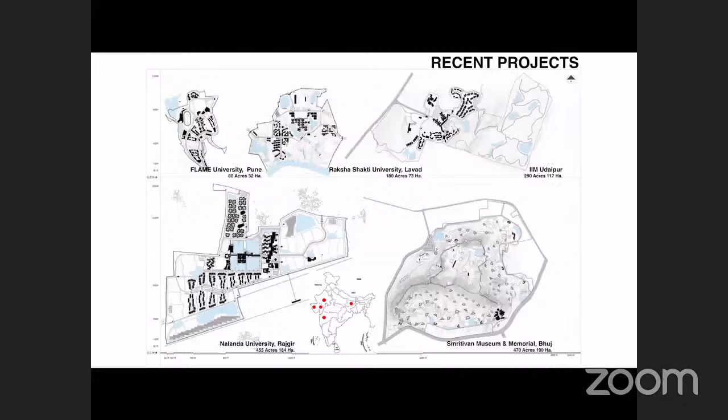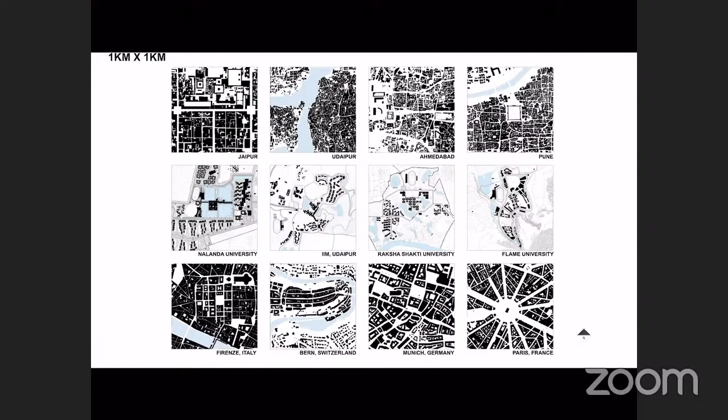So these are cities in a sense. And then, of course, we imagine that these campuses will be in isolation because they're mostly in remote places away from the city, because that's where you can get land cheaply. But what happens once you get this land?

Slowly, this university comes in, and as I call it, the pebble in the pond effect takes place. You drop a pebble into a pond, and these things that flow out from it start creating points of interest, and all the land values around go up. So if you look at our very own IIM in Ahmedabad, Vastrapur was a small village. When the IIM came in, it seeded the place, and after that, the whole city grew around it, and now it's very much part of the city.

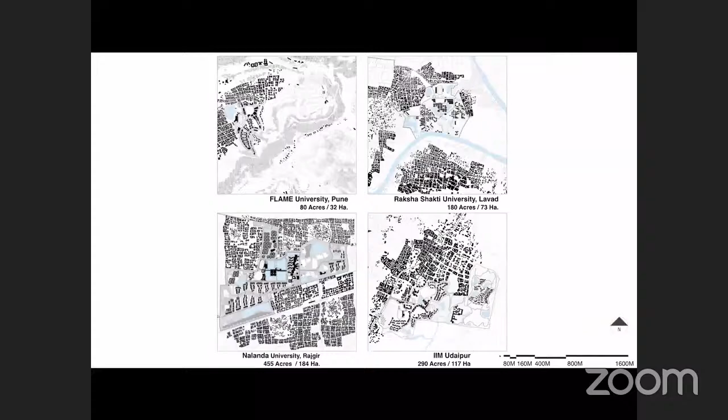If walls were taken off from all these campuses - and in fact we design them with many gates so they could be kept open over time if circumstances allow and the authorities believe in those ideas - these become the focuses of the heart of the city that grows around it.

All these campuses are in very different locations, from Bihar in the east to Pune in the west. If you look at the land in Rajgir, Bihar for Nalanda, it's absolutely flat land.

It rains very heavily there, 1200 mm. It rains a lot, it floods in fact. So you have to worry about flooding and collecting water.

On the other side, if you take something like Udaipur, there is no water at all - you can't even do a bore in the campus area because there's absolutely no groundwater available. You have to make all your own water arrangements.

So in Udaipur we started with 5 lakes, which we interconnected and made them work together. I'll show those to you as we go along.

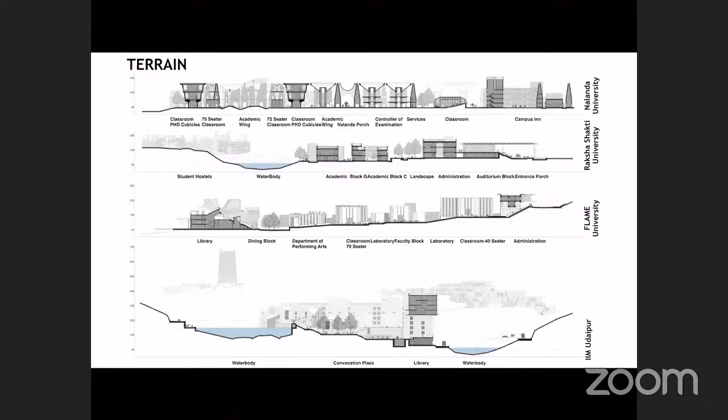The terrain there is hilly, absolutely rocky. If you did a slope analysis, you'd say you can't build out here, but then you have to build. So how do you build in places like this? How do you connect hills, and make them so people, even someone physically challenged, can walk comfortably? These were the challenges we faced.

This first campus, as I said, started in 2004. Actual construction started in 2005, and now it's a flourishing campus for the past 15 years, with just over 1,000 students at the moment.

It started with this idea of Oxford and Cambridge. Our client, a friend of ours - this is a private university - came to us and said he has a senior partner who wants to give back to society, wants to be a philanthropist because he's made so much money.

He wanted to build a Jain temple. Our friend told him that instead of a temple, why not build an Institute of Higher Learning? The gentleman agreed to find out what they could do. Our friend came to us and said, you guys have designed IIMs, why don't you tell us how to do an IIM? We said the government does IIMs, but if you want to do a private institute, let's take you to the IIM here.

We met with the faculty and they had a seminar for him. Scientists, teachers, and various academicians all came together and said, if you want to do a good institute, you need very good people to come, and for that you need to focus on undergraduate students rather than postgraduate students.

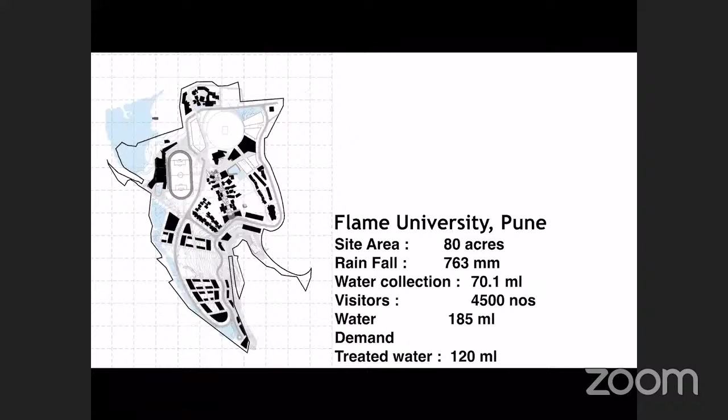Our central idea was very simple: to have a spine out here, and around that the housing happening. From this spine, there was a liberal education program, which also meant students had almost 40 choices to take up - humanities, sciences, philosophy, rhetoric, all kinds of subjects.

In your first 2 years, you did all these subjects and got an idea, because very often in our countries children have to make a decision very early on - engineering stream, doctor stream, medical stream, or commerce stream - and then they're fixed for life and often can't change. Here, the idea was a 4-year undergraduate program where in the first 2 years you experience all these various things and see where your aptitude really lies, and after that you go on to what you want to major in and then minor in.

You could do any kind of combination - mathematics and music, for that matter. These combinations were something very important, so we said we'll make a bazaar of knowledge. These laboratories, classrooms, and various other things were put all across it.

This spine, about 120 meters, starts from a plaza where the library and dining hall are, and ends on a hill - it climbs up almost 17 meters. That spine has ramps which are very gentle, 1 in 20, and there are steps that climb up.

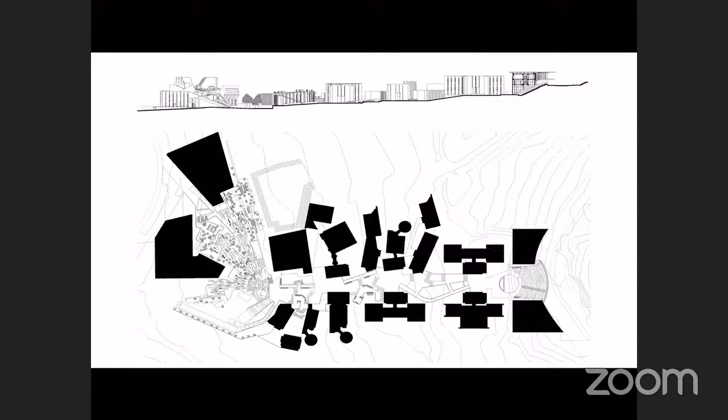We ended this spine from the plaza to an amphitheater which sits under this and is used, with a bridge over these two buildings - a student lounge open 24/7. On the other side of the plaza is the library. Here's the library and here's the administration, and this is the spine that goes through, with various science labs, music labs, performing arts and art labs connected together.

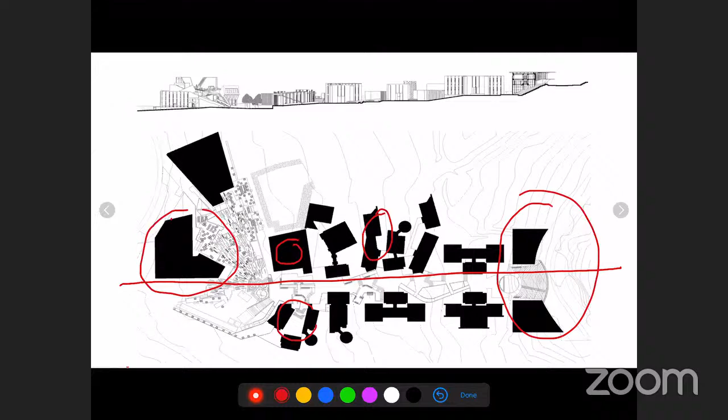This is how it started - the land, as I said, is sloping. One of the things I wanted to share is that I like to sketch out things, so this is how the land was. I was looking at a series of plinths climbing up the hill, from precast furniture to the library buildings to the system of construction of portals that could be put together.

N.K. Shah and Anil were the structural engineers, and we worked out this wonderful system where you do a portal of standardized size spanning across the span. Anything from 7 meters to almost 24 meters we have spanned using the same system, just by changing slight thicknesses and changing the steel in it.

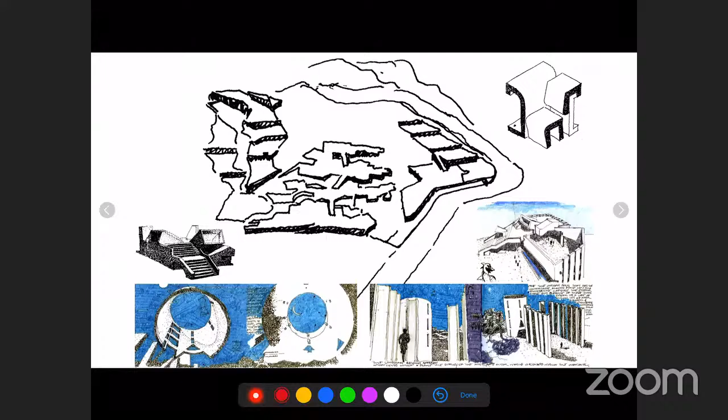And they look almost the same, so your shuttering and all can be repeated. So this is the kind of things that we started conceiving.

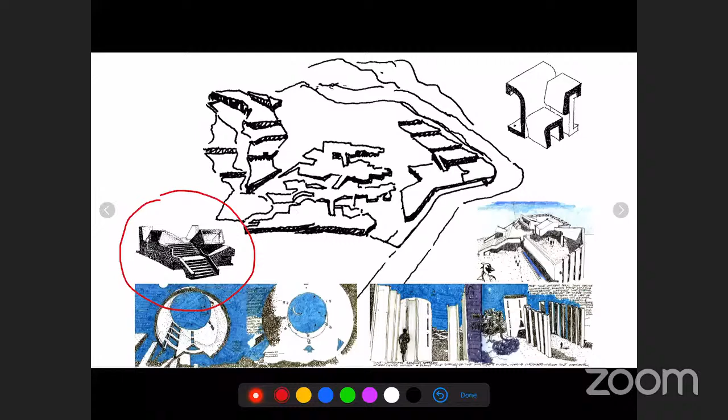You can see some of the buildings, like this is the dining hall. The other thing I had was, do we need a building that looks like a building, or is it a part of a hill with steps going up and skylights where light comes in, so that you connect back all the time to the topography that is there. So these were some of the ideas that one started with.

This is what it looks like today when you arrive there. You have this vast cricket field, beautiful cricket field. And then the university sort of spreads up and the trees have grown in. Since all the buildings are disaggregated, the scale is rather nice and comfortable.

The idea is that you have such a scenic spot, and if you are always in buildings and never go out, then what's the point? So the idea was that you have to walk. Part of the learning is in the walking, that when you walk, you encounter, you meet somebody. There are 5 campuses, 5 cafes on this campus. Take a cup of tea or coffee with somebody, talk to them, maybe a teacher, maybe a peer who's there, and enjoy the views of the hills around. Don't forget, there are wonderful views of the hills.

All of these things were the ways we worked towards this. So this is how, when you enter that plaza, the flame is a cold flame. Actually, that's the air conditioning cooling spray, and the spray pond. And that sort of invites you into this tunnel of landscape and the steps going up to the spine.

But when you come here from this plaza, facing you is the library. And again, this is a building of steps. When you go up, you can sit there in contemplation. You can watch the sunrise and sunset, watch the beautiful hills around you. In the evenings, it's full of people sitting out there, taking it in as a social gathering space.

So it is always used by people around, and it'll give you an idea from this aerial shot.

You can see the library out here with the steps. You can see the dining hall with the steps, and you can see even the performing arts with steps on top, so that's used as a theater on top also. And then you can see all the various roofs and the trees going in and the spine climbing up. So it gives you a sense of, in 15 years, the kind of landscape that has come up and grown over time.

This is the spine as it climbs up that 17 meters, as I was telling you. There is a series of gateways into each building, and the gateways are essentially all the utilities that are there - vending machines, toilets, staircases, firefighting, electrical rooms, etc. And through that you pass, then you come into a holding area from where you go into the classrooms.

And again, you face gardens as you go along from that, and it's extensively used by everybody out here. The whole spine ends up towards this building, which was added only about a year ago, was completed a year ago, and this is the administration.

Now, the administration is very interesting. There are 3 floors, out of which 2 floors are for the deans, the vice chancellor, the president of the university, and other administrative duties. The rest are for students, including the top floor.

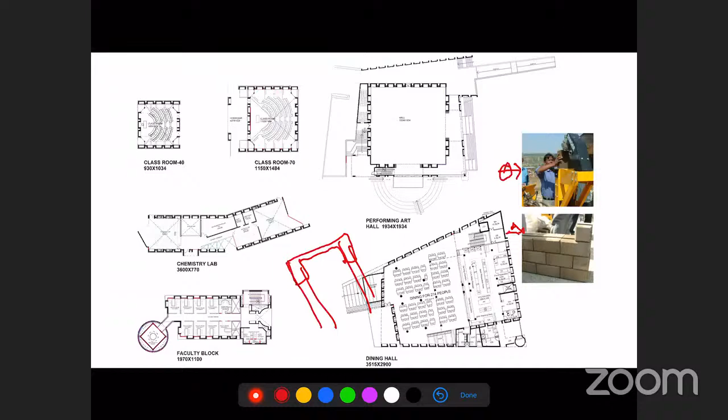And then these portals, as I said, are used in various ways. This is one place it shows the system, and they just stand to give a screen out there.

The next project I'm going to show very fast, since I think I'm running out of time, is what we call the Hawa Mahal. This is in Lavad near Ahmedabad. It started as a police training academy, for people who will go through this. Now the university is functioning from the campus.

Our client at that point wanted the forts of Rajasthan. So first he wanted us to build a fort wall to enclose the whole place, about 4.5 kilometers. We did a precast wall, and out of that, some elements we made using GRC, which were made later on for the buildings.

We said, like Hawa Mahal, since you're not having air conditioning and all, well, then he went with that. And the next one came, and he said this is going to be a full-fledged university. We are going to have postgraduate courses. We need air conditioning. So the buildings became air conditioned.

So over the time that it started to now, it has kept on adapting to various changes in programmatic things. This is what happens over time in any such campus project, especially government projects, where directors and vice chancellors come and go.

The land is very interesting. It's Kotar land, which is changing every monsoon. It erodes—these are all erosions, as you can see. Complete erosions. And there are drops of 8 to 9 meters down.

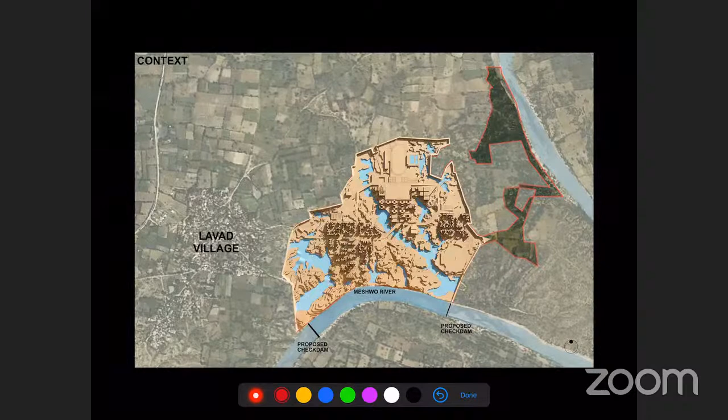So rainfall is minimal, and there are all these tanks. These are various clusters out there. Then they had things like a parade ground that they needed, around which sports facilities were placed because of the nature of things. Then they needed training areas, etc. We started, and now it is expanding—the next phase is almost adding another 12 schools to the existing 5 schools of studies already there on this campus.

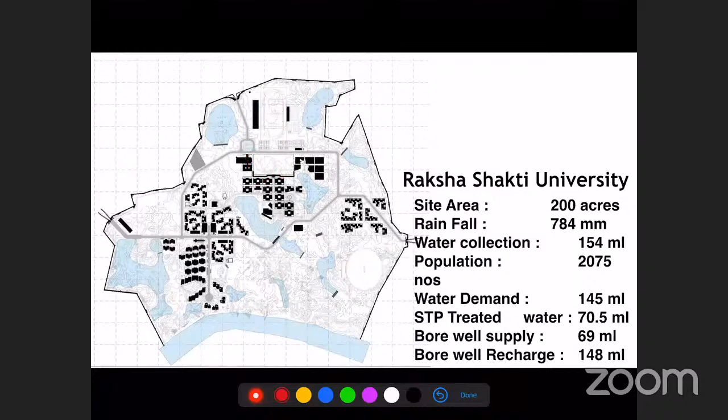Now, this gives you an aerial shot of the whole campus. That's our main gate out here, and then the main administration building, etc. Then the cluster for residential areas is on the far side out here. And you can see the kind of land that is there.

This is a recharge lake out here. This is the permanent one under construction—these were taken some time ago. This is the permanent one.

Again, some more views, and this is what the thing looks like. This precast system that we worked out has been used extensively as a fenestration to control sunlight and to control water ingress into it.

And this becomes the facade element, as well as in this case, a porch element. It's quite a beautiful porch with light filtering through it, with these light elements sort of floating like birds hanging out there, and you get filtered light.

And this whole space can be used, the roofs can be used again, even for informal gatherings and get-togethers overlooking the parade ground. That's the parade ground and the buildings around that.

Some of the courtyards of the learning areas and the passages through that. As I said, this has just been completed, so the landscape is still to pick up. Plantation is still carrying on, and this monsoon, hopefully, there'll be a lot more.

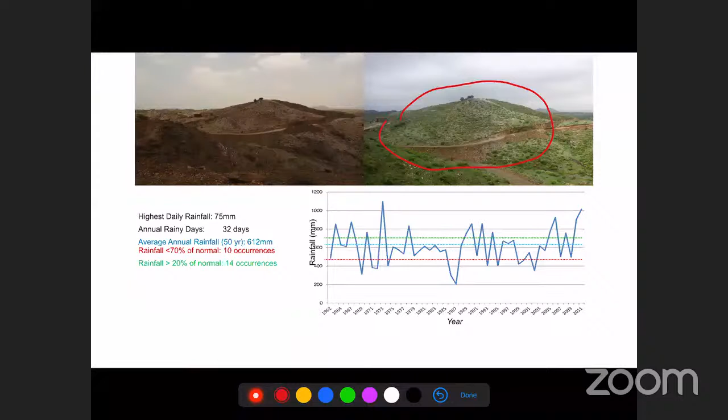But the beauty of this place is that in the monsoon, all of Udaipur becomes green. And so if you start looking at rainfall patterns, etc., you start saying, how do I collect water? And so we did this topographical analysis to show where the water flows.

And we chose to site our things along this major watercourse, which joins a major watercourse that connects up to this. And the land is divided up into two parts, the western campus and the eastern campus.

And we are building on the western campus in phase 1. And what we did was that watercourse, we divided up by a plaza, and we allow the overflow of water to go underground, but the top sort of fills up out here.

It's a very deep lake. And along that, all the academic blocks are put up. And so from the two hills, this plaza is the connector on the ground, and then the blocks are connected.

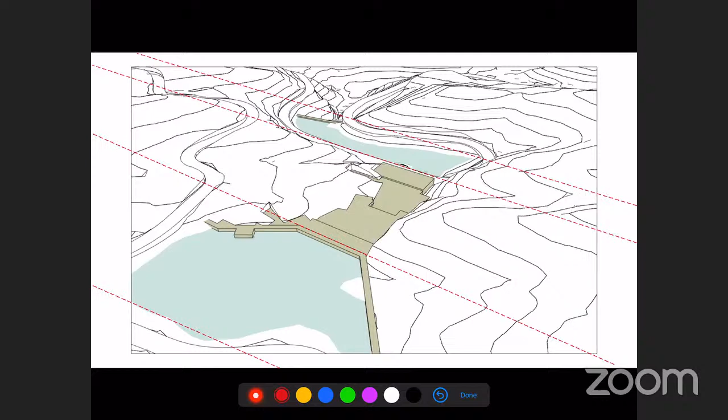And in the sky, 6 stories up in the air, we have a library and a bazaar with conveniences and restaurants and cafes and gyms, etc., and various facilities connecting the two sides and joining an amphitheater.

And the student housing comes on one side and the faculty housing comes on one side. And this is the part that sort of connects the two together and also connects at the ground level up here. And then various classrooms, etc., offices, etc., happen within this.

Very much like a Rajasthani palace as such, one would say. And then our water supply is assured because of this first lake, which is lined. Then it goes into the second lake on the other side.

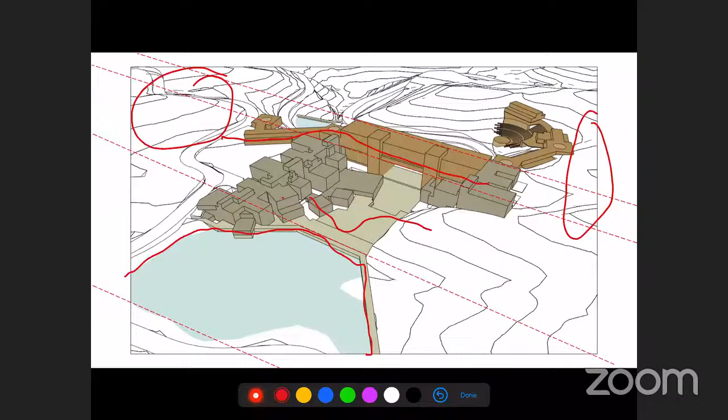And so this is the campus, that this thing that I was showing you, the academic block, and the connection is here, the plaza is here, and the lake is here.

And the second lake is out here. And then there are lakes lower down out here, and there are 2 more lakes out here, using the natural contours of the land.

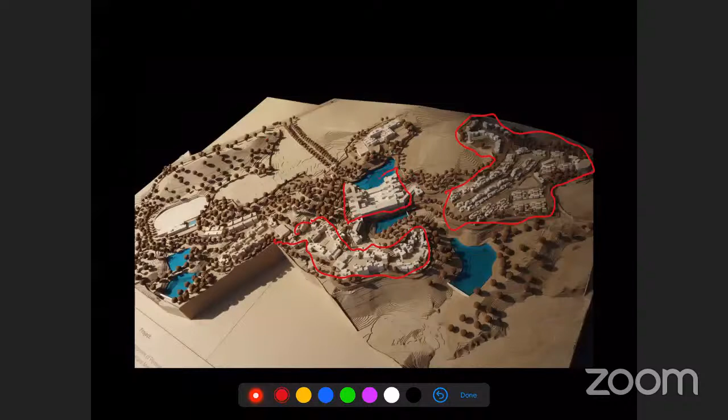The soil is all rock, and it is fissured rock. So we have to line up this particular lake to hold the water. Otherwise, you can't do this.

And so the lining is done through a membrane, and then there is this thing on top of it, a protective layer on top of it.

And so this, you can see this lake, and there is a walkway. And even the public is allowed to walk around and use the lake in the evenings or in the daytime. And the rest of the campus is kind of set back so that you don't actually disturb anything in the campus, and it's secure. And this is what the plaza in between that place is, again, as I said, and the bridge of the library cutting across it.

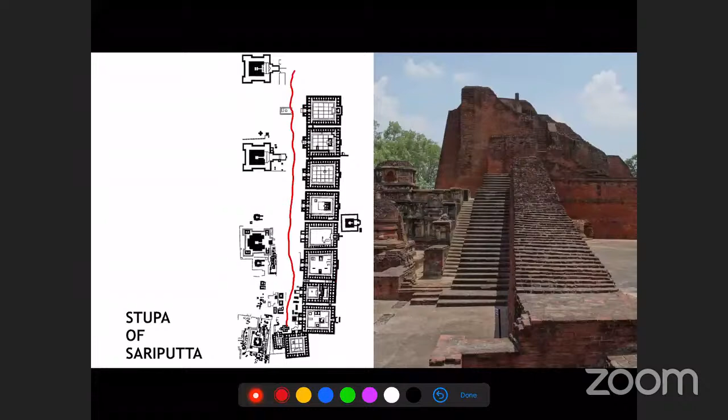And these were pathways connecting the various villages. So we came out with a very interesting idea - how do we connect the water, keep the pathways, and allow gates to allow people access through this.

Very important thing - our backdrop is the Rajgir Hills. The Rajgir Hills are very, very well known in both Buddhism and Jainism, because this is where Mahavir came and meditated, and the Buddha came and meditated. Both these - it's very, very holy. And even for the Sikhs, one of the gurus came here.

And so you can see this stretching in the backdrop of our campus, that this is sacred land. How do you remind every student who comes here that this is a sacred land, and where you come to is a special place - it's not any place.

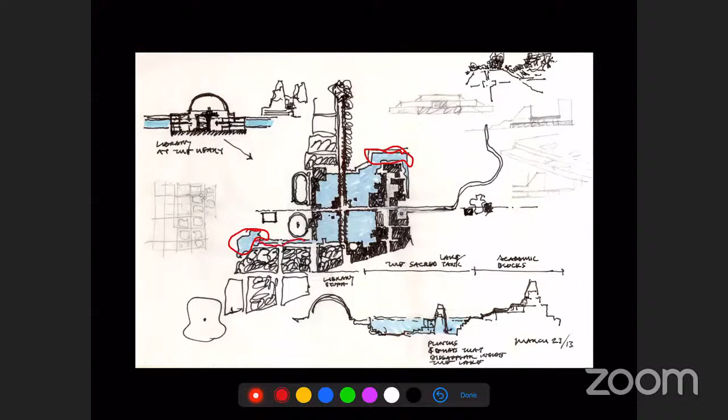We decided to connect these two water bodies by a larger water body here and place all our things - the common facilities, the academic blocks, etc. - in the central zone, and then have housing for faculty and staff and housing for students on the two sides to share these common facilities. So this is how the sketches - you can see March 23rd, '13, this is when the competition was going on. We started.

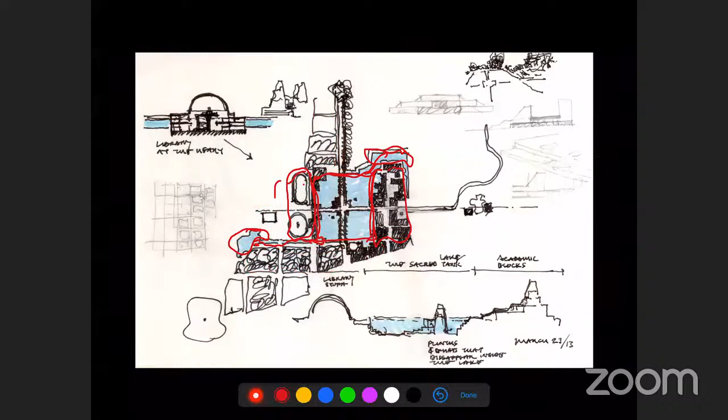And then the major issue was, how do we collect water and hold it for a year and a half? This is one of the largest net zero campuses in the world. So water, waste, and energy all have to be done independently of the national grid or other sources. And we cannot do bore wells either, even though it's very easy to do out here, because it was all agricultural land around us. So we made this whole system of capturing rainwater, which also acts as a protective measure against floods, where these holding ponds become very useful. The traditional system called the ahar-pyne system, used in agriculture, is what sort of laces this together with wetlands and water bodies.

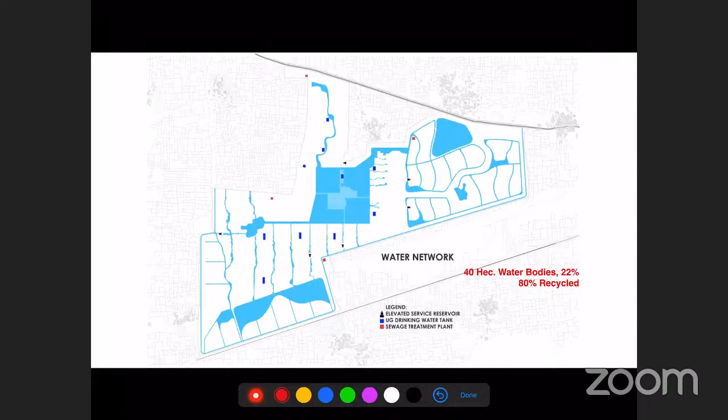The other issue was, how do you locate things? So with 455 acres, how do you make a walkable campus? We said that if you take the heart of these lakes, the one that we're proposing, within 10 minutes you should be able to reach the furthest point. So this is how we decided on locating things.

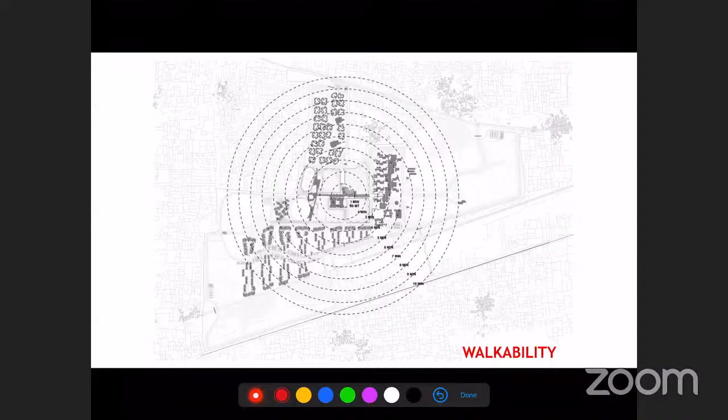The rest of the campus, almost 60%, is completely free of any building. There's going to be experimental agriculture, because one of the first schools that started was the School of Environment and Ecology, to help farmers and local people understand how this place could be used experimentally. People would walk from one area to another, see these farms, and actually use the information available at various outreach centers.

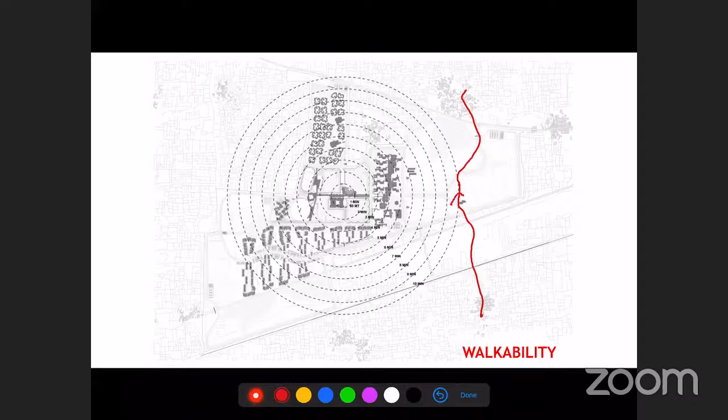So this is how the master plan was done. Obviously what you're seeing is a completed version - it's gone through many, many changes, and it is now under construction.

We'll give you just some figures out here.

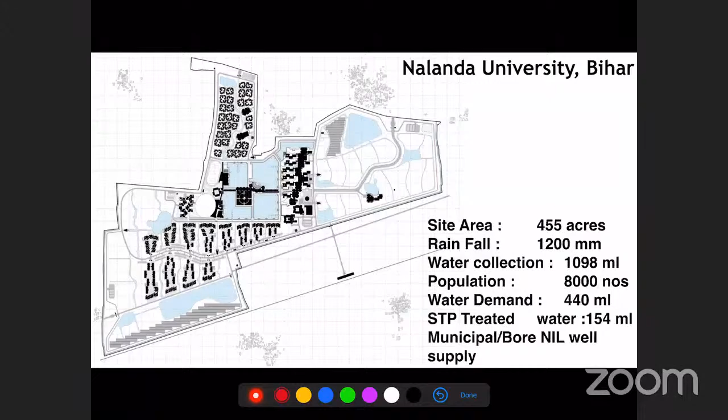One of the other things we looked at is that we were making these lakes - this is clay soil, it makes some of the best burnt bricks in the country. But we didn't want to burn anything and cause ecological damage. So we are using a mix of compressed earth block, which is without any firing. For the plinths we are using burnt brick from the local area. And we are using our own soil, excavated from the lakes and ponds, to make this. Both main contractors, one for housing and one for non-residential areas, have set up plants manufacturing anywhere between 7 to 10,000 compressed earth blocks a day.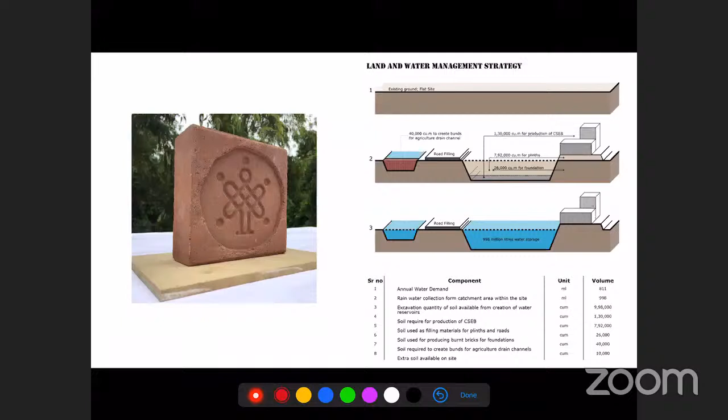This is what the bricks we are using look like. And the way we used it is that if you go to the ruins you see this stepping back, serrated edges of the brickwork. And that started the whole idea of how we would make the construction of the whole thing.

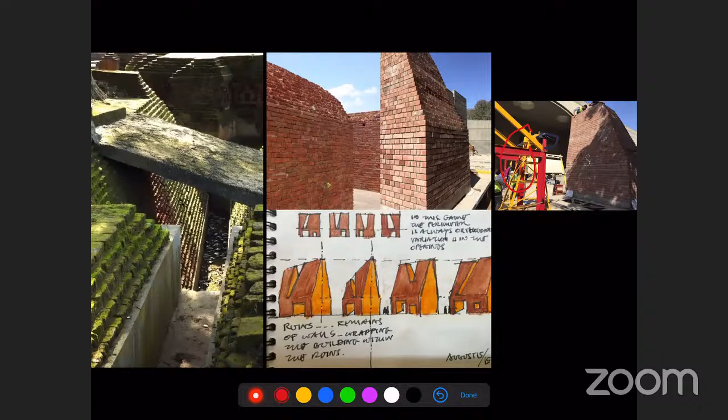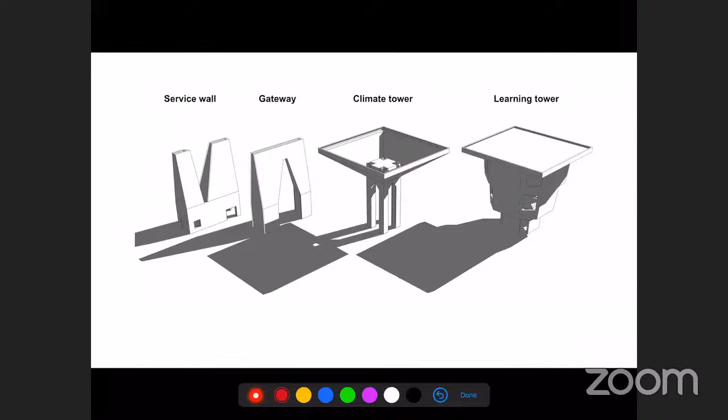The construction is essentially of 4 elements: these walls, which we call service walls, sometimes with punctures for gateways; towers that have our DEVAP system, climate towers that supply air conditioning to the buildings; and then the learning towers where the various classrooms are - so you have a smaller, bigger, and a bigger classroom.

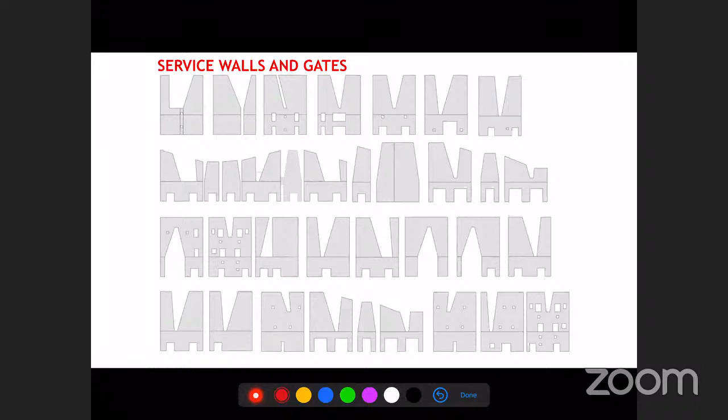Now, why did this all come about? I think some of it comes from wanting an enclosure of the place, and we didn't want corridors, but large spaces where the landscape and covered spaces intermingle. So the edge condition, what we call the service walls and gates, have variations. The basic construction system is the same, but the top changes all the time to allow views, light, and breeze from various points.

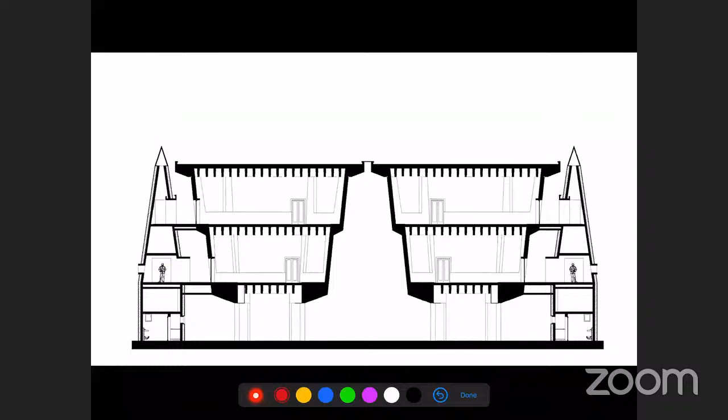So these are the service walls - you can see AHU rooms, toilets, staircases, vestibules, etc. They are not continuous but cut so that light and breeze come through. Inside, you get classrooms like this. Now what's very interesting is that when you do this, you also start getting a figure ground which is like a stupa in reverse, or a stupa in the negative space worked out like that, which is also related to the Buddha and meditation, as you know.

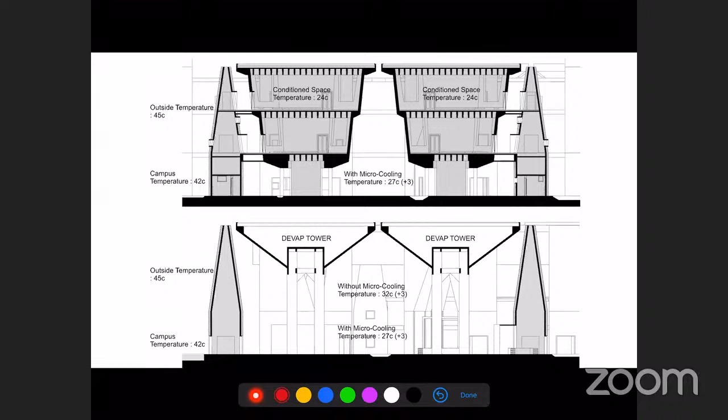That has become stylized and rounded over time. So this is how it started. Now it does something very important: it helps us make our energy use very low. If the outside temperature in the city is 45 degrees, inside the campus it's at least 3 degrees cooler because of the landscaping. Within that, in the shaded areas, it goes down to about 32 degrees Celsius. So you have to cool only from 32 to 24 in the classroom. That means the energy you're using, remember that 60% of our energy is used to make comfort conditions, reduces drastically. Generating electricity for us then becomes a simpler matter.

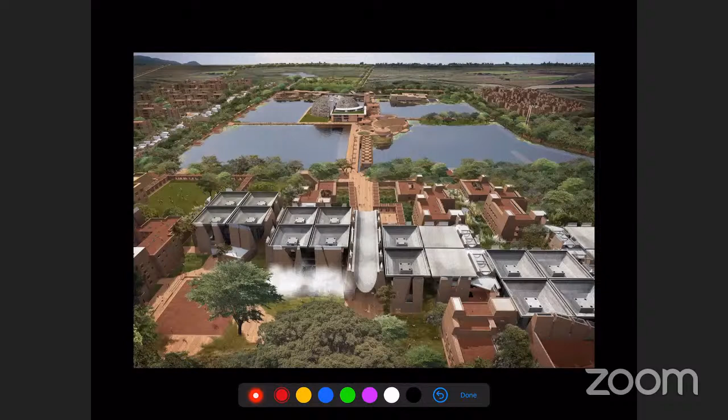This is a model that shows you how these various openings that I was talking about in the service walls happen and allow. And then these are the structures in between. Here's a view of what it may look like, and this is what it is actually looking like now.

So the lakes have been formed, and every monsoon they fill up. There is no lining out here because it's clayey soil. The bricks you can see, the burnt brick, is here in the plinths and some parts going up. The rest of it is all compressed earth block, and it's weathered several monsoons already during construction.

These are those chhatris with the air conditioning system - big towers like water tanks, which give you shade and give you these volumes in between. You can see them under construction. These are in exposed concrete.

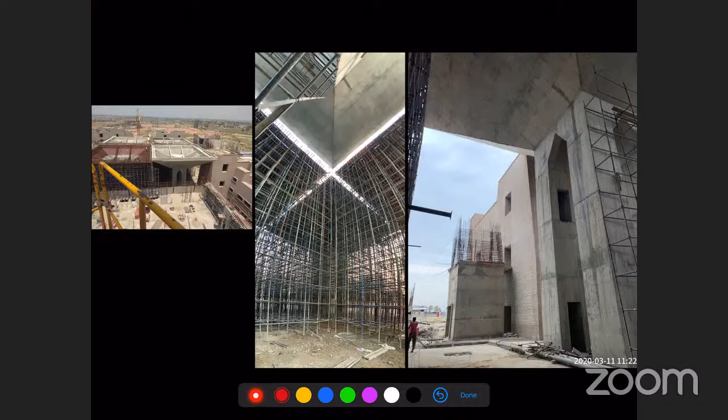And then smaller scale spaces where the classrooms, the various offices and things are. V.R. Shah is the structural consultant, and he has worked extensively with us for all the earthquake work, as well as working out the block work that we have done. You can see some of the construction and the quality of construction.

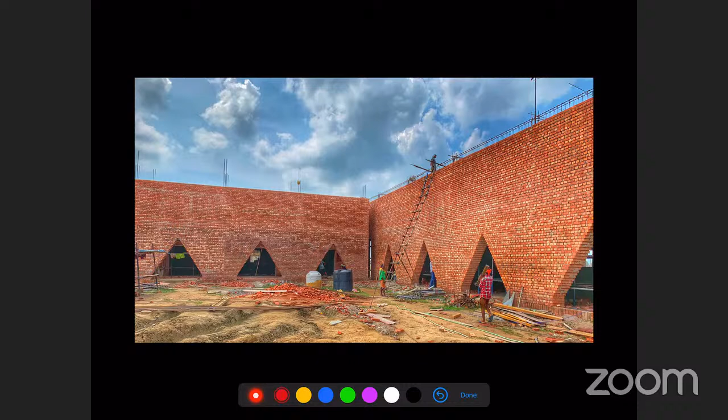So different parts as they're being completed. Now the housing is all - those are RCC structures, but the housing is all load-bearing compressed earth block and brick. You can see that is almost 60% of the construction. It's very dense, but also very well ventilated in between to make clusters and courts. This gives you a view from the model and then some of the actual construction taking place out there, and you can see again the quality of how things are turning out with the block as well as the brick.

And lastly, I come to our net zero strategy. The idea was how do we shake hands with all the villages around? In the ancient texts, it was written 200 villages used to contribute the required provisions for 3,000 monks and students. We said, can we reverse this? Can Nalanda University actually shake hands instead of them supplying things as a Jagir? Can we reverse it by helping them?

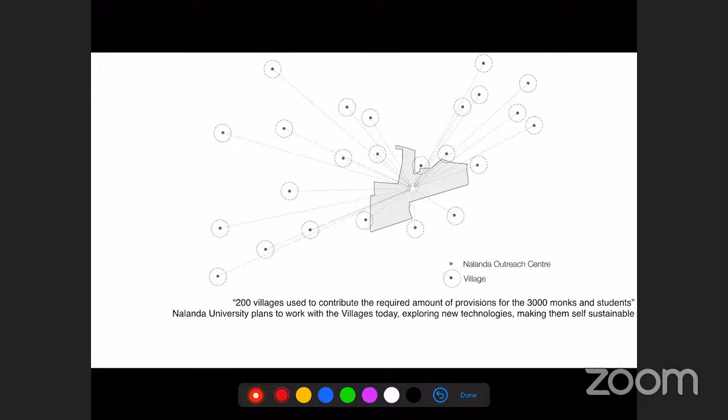So we looked at a resource cycle, a comprehensive view of what a net zero campus could be - whether it is supplying food, helping in collection of rainwater, but also looking at community involvement for seeds and water and research, but also looking at organic waste, biofuel, electricity, or sharing biogas.

As I was telling you, our whole strategy of generating electricity uses a resilient system where you can use animal waste, human waste, forestry waste, agriculture waste, and a combination of PV panels, etc., to feed and run our external combustion engines. From that, we use that heat to also take out the humidity from the air and cut down our cooling loads. So our cooling system actually requires a lot less electricity than it normally would.

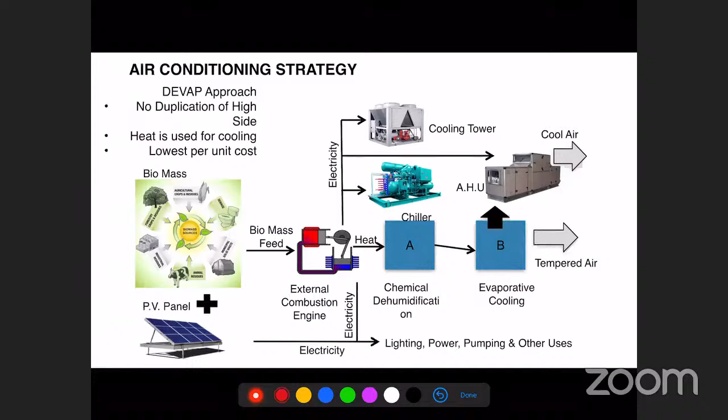And if this becomes successful - one of the things we did was look at the raw material required on a peak day of organic waste, cow manure. We did a survey around 4 kilometers of this, which is going to be outsourced eventually - chicken manure, human manure, etc., whatever is available. Gas would be given from these to us, from this agency, who would be allowed to set up a plant on our site. So if you look at what is in the 4 kilometer radius, we can actually produce more electricity than we are going to consume.

So we are saying here's an alternative way of looking at energy needs, which could be used, because we are a nation of cattle owners. So instead of batteries and storage and all of that, we are saying use cow tech instead of high tech. Digesters don't need any taking care - owners of their digesters are taking care, and only their waste is being used. A quarter of the entire world's population of cows is here. So should we be using this as a resource?

So with that, I come to the last thing, where our water journey began. This was the same time in 2004 that we started working on Flame, and we were approached by the Gujarat Disaster Management Authority to plan out a memorial for the earthquake victims of the 2001 earthquake. They said plant a tree for each victim, and our present PM, who was the CM at that time, said we should plant a tree for each victim. We found out there were almost 14,000 victims, 13,805 victims.

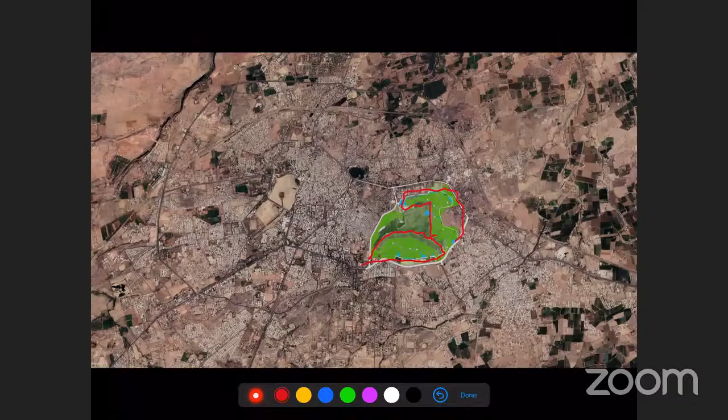This is what Bhuj is like normally, and this is what Bhuj is like in the monsoon. So we said, how do we collect water? We started working out how to collect water from the hill we are located on, and traced every stream of water that flows during the monsoon, every drop of water. The drop of water is important not only for water itself, but it also picks up soil and nutrients. If you understand this water cycle, your plants can survive. They don't require any maintenance except for the initial 2 or 3 years when you first plant them. After that, the monsoons will keep them going. It's essentially seeding a forest.

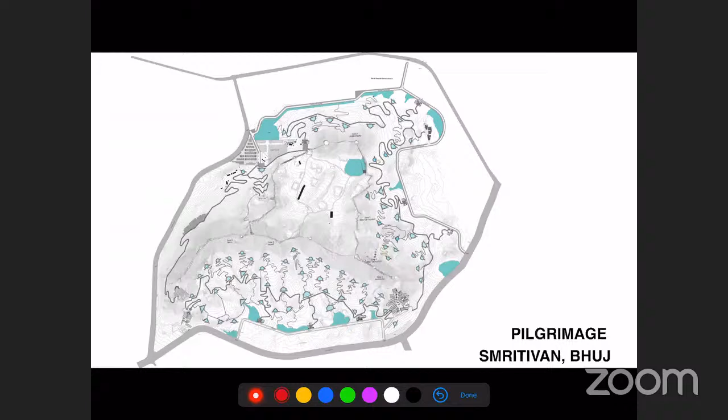Instead of doing one reservoir or a large dam, which costs a lot more and can't be phased out, we did this whole series of 93 proposed reservoirs, of which 81 were built, of different sizes. This is how they're located along the flow of water coming through. They're made out of gabions, so the water comes in, soaks into this, and recharges the soil.

We don't hold the water. In the monsoon, the water fills up, as you can see, and then slowly the landscape covers these steps that come up out there. These are older pictures. Hopefully in the next couple of years, this place will become completely green. And these are some of the views from there.

Some water remains permanently, and the rest of it soaks into the earth. In the monsoon, the water can fill up till here, and then slowly it recharges. This part of the water is permanent.

This is how the place looks. Those gateways you see are like the paliyas, the traditional ways to commemorate heroes who passed away. The nameplates of the people will be put inside. This is a view at night time, and the park is already informally being used.

One part of it is what we call the sun point, where there's a ring 60 meters up in the air. Remember, this is earthquake zone 5, so everything is moving. It marks the position of the moon on top and the equinox solstice on the bottom for the sun, so you can see how the sun cuts through it. It's like Jantar Mantar, and it goes across like this. You see spectacular views of the surrounding area, including Bhuj city, from here.

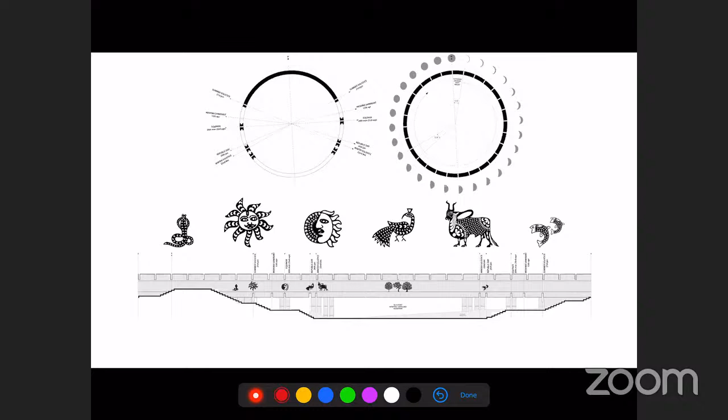On it are symbols that reflect the pastoral background of the people, fishing, cattle rearing, the forests, and of course the oldest temple, why Bhuj gets its name - the Bhujio Dungar gets its name from Bhujang Dev, the Shiva temple or Nag Devta. The symbols are carved into this ring that sits around it. That's what it looks like.

So with that, I think I will end my talk. I'll be willing to answer any questions you may have.